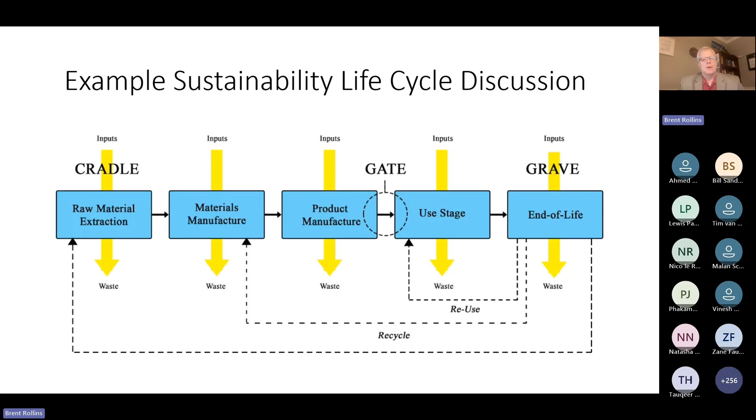So we're going to talk in the panel discussion possibly about what the future might hold, so I'll leave that for then. But for now, where we are is mostly cradle to gate analysis in the embodied carbon of what it takes to make a cubic meter of concrete. And what we're going to be discussing now is an alternate or additional approach that I believe we should be considering, which is cradle to grave, meaning that you take into account the life expectancy of your concrete structure so that you can have an annual average embodied carbon for the life of the structure. I think that the length of service life is currently being overlooked a little bit, but we will talk about where things are going with the American Concrete Institute, as well as reference some FIB information today.

So to start with, just to refresh everybody on Portland cement concrete and the basics, and this is important to understand where colloidal silica fits in. I know most of you probably know this, and you're going to be looking at the next 2 or 3 slides and say, Brent, I didn't sign up to learn the basics of concrete, but I'll touch on it, and then I'll show you where colloidal silica fits in. But first, I'm going to share some statistics.

Did you know that concrete is the second most used substance on the planet, behind only water? In fact, 2 times as much concrete is used as all other building materials combined. That's a tremendous amount of concrete. To put that into perspective, we make enough concrete on this planet to go to the moon and back 48 times with a 4-foot wide or about 1-meter sidewalk, somewhere around 100 millimeters thick. That's a lot of concrete.

But the problem is that too much of that concrete is replacement concrete for concrete that has failed or aged and needed to be replaced. We think of concrete as being a permanent thing. I mean, if you refer to an idea as a concrete idea, that means it's solid. It's something that's going to last a long time.

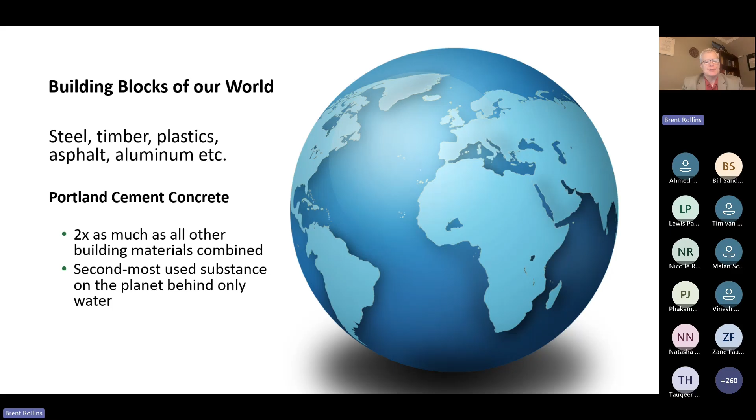It's got huge implications. Well, when we think of concrete as a permanent material, we're giving it some credit that it doesn't deserve. It's a good material. It's a great material, but it doesn't last forever. We're going to dig in a bit to just what the causes of that could be and why our concrete isn't lasting as long as maybe we'd like to see it last.

So we use so much concrete because it can be cast into virtually any shape, especially with the new chemical admixture technologies that allow things like self-consolidating or self-compacting concrete. It can take on the shape of a form. In years past, in the 1960s, you could get concrete in any shape you wanted, as long as it was square, rectangle, or in the shape of a pipe. So now you really can get concrete in just about any shape that you want.

Concrete does carry loads. It does what you engineers want it to do, which is to hold up buildings and resist things like wind loads and live loads. It is durable compared to other building materials, and it can be green.

Excuse me. I've got some water here, not anything else.

And what I mean by that, it can use recycled materials. It can even reduce the heat island effect. Just as a quick note, dark colors in an urban area absorb sunlight. Dark roofing materials and dark paving materials generally cause an urban area to be a few degrees warmer than the surrounding countryside. So by using Portland cement concrete, we can produce a lighter, more reflective surface that reflects more sunlight than it absorbs, and thus lower the temperature of urban areas. So that's one way concrete can be green.

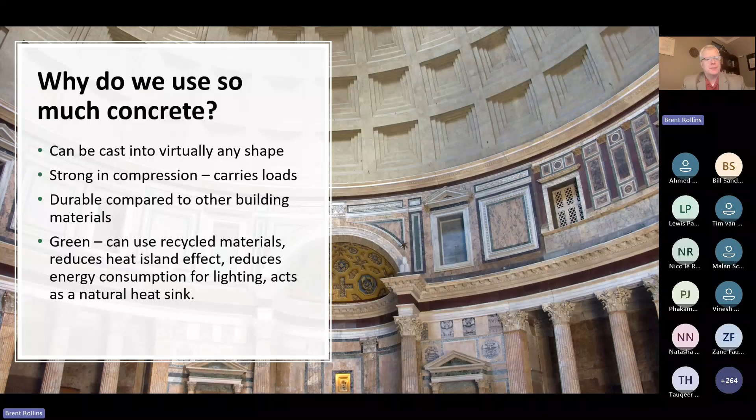So concrete, again, we're not going to spend a lot of time on this, but fundamentally, concrete is made from Portland cement, coarse aggregate and fine aggregate, and water. That's all you need to make concrete. That's the way we've been making concrete for a long time. However, most modern concrete uses something known as supplementary cementitious materials, or pozzolans. In some cases, like in Europe and I believe in South Africa, that pozzolan is often interground into the cement, like what we're doing with the limestone here, or in some markets it could be purchased separately and stored in a separate silo to be weighed up separately from the cement.

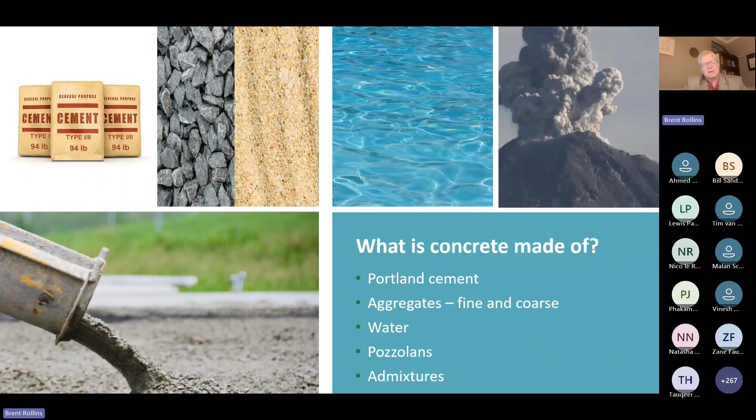Most modern concrete also contains chemical admixtures, and chemical admixtures exist to do just about anything you'd like to have your concrete do. If it's cool and you want it to set quicker, you can accelerate the setting time with something called an accelerator. And if it's setting too fast in the summertime, you can slow that down with a hydration stabilizer. You can use water reducers to make the concrete move without adding water, for instance, and on and on. So again, our focus is going to be pozzolans for now, because I want to show you where colloidal silica fits in.

And one of those volcanoes, the most famous, Mount Vesuvius, erupted in the year 79 and scattered ash throughout the countryside. And the Romans found that when they would incorporate this ash into their concrete, the concrete was more workable, got better strength, and seemed to be more durable. So they began using this ash. Well, that technology was lost for several centuries. And then in the early 1920s, a Cal Berkeley researcher posited that ash from coal could have some effects on concrete.

And thus, fly ash was born. And fly ash is the most widely used pozzolanic material from coal burning power plants across the globe. However, as we adjust our power grid and we start looking at materials and processes that are not coal burning, fly ash has started to become in short supply in some markets. I think we still have quite a bit to go through, but it's caused us to start looking at other pozzolans. And all of these other pozzolans that you see are supplementary cementitious materials.

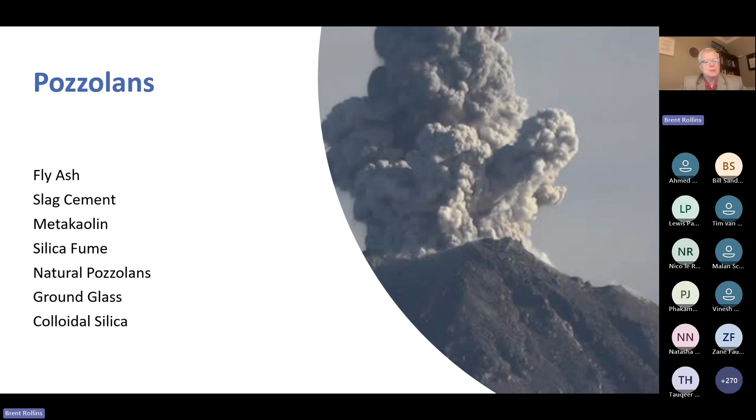So let's get into why that pozzolanic reaction works, what happens. So this is a bit of a science class, but it is simplified. And I took this from some slides from Georgia Tech, famous Georgia Tech professor Kimberly Kurtis. She's the originator of this slides idea. I use my own images though.

So if we take cement and we add water, magic happens, right? The cement begins to harden, it begins to gain strength, and that is a chemical reaction that produces, among other things, calcium silicate hydrate. That calcium silicate hydrate is the major reaction product that gives concrete most of its strength and durability. Among other reaction products, there's one called calcium hydroxide that is also produced. That calcium hydroxide really doesn't add much to strength or durability. It just sort of sits around in the concrete waiting on something to react.

Well, along comes pozzolan. If we put pozzolan in the concrete, whether it's mixed in or somehow applied later, as we'll see, you get a chemical reaction that consumes some of that calcium hydroxide or portlandite to produce, guess what? More CSH. That same reaction product that produces the strength and durability that we want with concrete. The pozzolan produces that secondary CSH. So that's the key reaction.

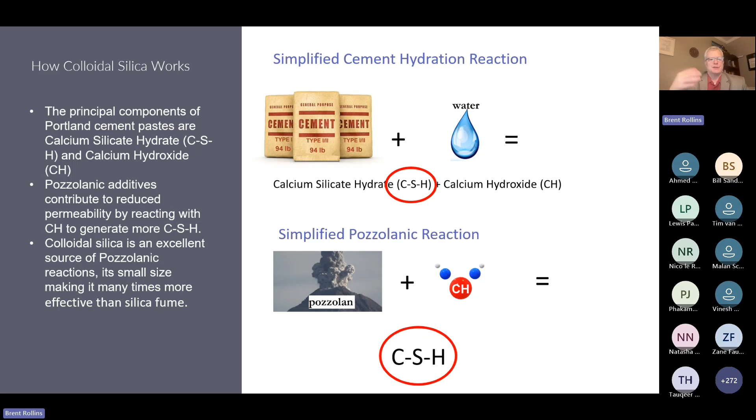And when you bring colloidal silica into that, being a pozzolan, that is the reaction for colloidal silica. However, colloidal silica is able to produce this reaction much more efficiently than the other pozzolans because of its small size. The reason this is important is concrete's permeable. We don't think of it as being permeable. We think of it as being a hard, solid substance that lasts forever, right?

But the reality is that almost all concrete, I don't want to say all, is made with more water than is needed for that initial chemical reaction to take place. There's a few reasons for this. Number one reason is that the chemical reaction between cement and water is not just a one and done reaction. It doesn't just happen on day one and then stop. The reaction begins as soon as water and cement meet each other in the mixer. The reaction starts to progress and build heat at various speeds, depending on temperature and grind of the cement and some other things. Then it's placed.

And when it's placed, some of that water that is in there to allow us to place that concrete leaves through bleed water channels and capillary void structure. So you have some evaporation of that extra water, that water of convenience that we use to help place concrete. Some of it leaves during the setting process.

What happens with that is that the little rivers that form, or the little capillary void structures that form, then become set in space as that concrete hardens. Now, I don't want to make it sound like they stay the same size throughout the concrete's life. They do fill up gradually over time with reaction product, but you have a route of ingress, a way for water and the contaminants that water carries to get into the concrete now, because of those little tunnels that were formed as the concrete was setting.

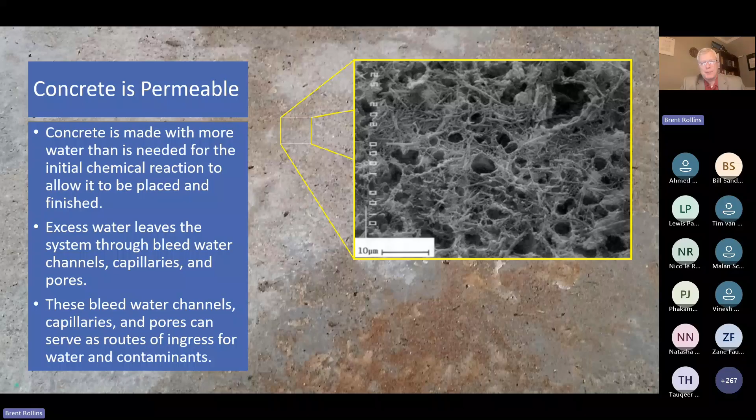So if you remember your calculations from school or what you work with every day, you know that as you lose reinforcing steel section, you're losing the ability to carry tensile flexural loads. So that is a major concern when it comes to concrete durability. All right, so I spent a lot of time on the background. I'm not asking you to believe me on any of this. The Portland Cement Association, based in Skokie, Illinois, has a great definition. Many others have good definitions on permeability and durability.

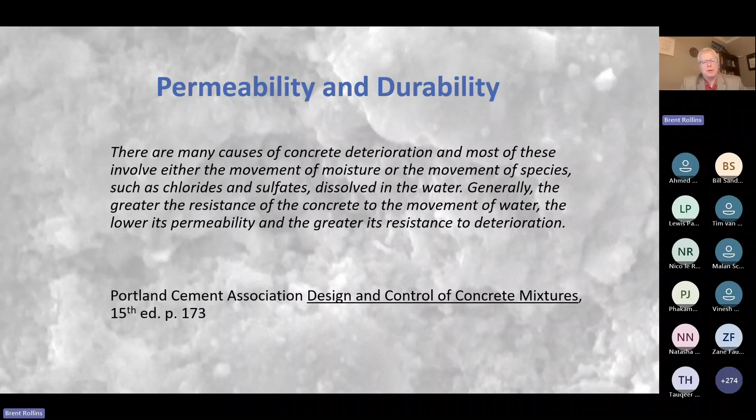But the reason this permeability is important is because it directly affects the durability of the concrete. As permeability goes up, durability goes down, and vice versa. If permeability goes down, then durability goes up. And you have some wonderful concrete engineers in your country, several whose publications have influenced my career, including Professor Mark Alexander, as well as Professor Hans Beushausen and others. The people that study concrete durability know that permeability is the key, and measuring that permeability and measuring improvements to it is the key to predicting service life of concrete. That's important because our concrete isn't lasting as long as we want it to, as we mentioned earlier.

Back in 2012, the American Society of Civil Engineers, ASCE, a wonderful organization, put out a publication that gave our infrastructure in the United States a D minus. Almost a failing grade is what that means. We do letter grades in the U.S., A, B, C, D, and A is the best, D is the lowest that could pass a class, D minus is lower still. What they found was that 1 in 6 bridges in the United States needed to be repaired or replaced back in 2012. That's not good because we have over 600,000 bridges in this country. And that means that over 100,000 bridges at that time were in bad shape.

And I hope that we've made some changes and improvements, and I hope to be able to report back to this group that we've fixed everything, but we're not quite there yet. The reason that I mentioned bridges, by the way, is bridges are publicly funded in general, and because of that, their inspection records, as well as publications surrounding bridge technology, are public record and are accessible. And they're the most studied concrete elements, really, in my country and maybe even on the planet. But it's not just bridges that are having a problem. I have a favorite saying that concrete doesn't know what it's going to be.

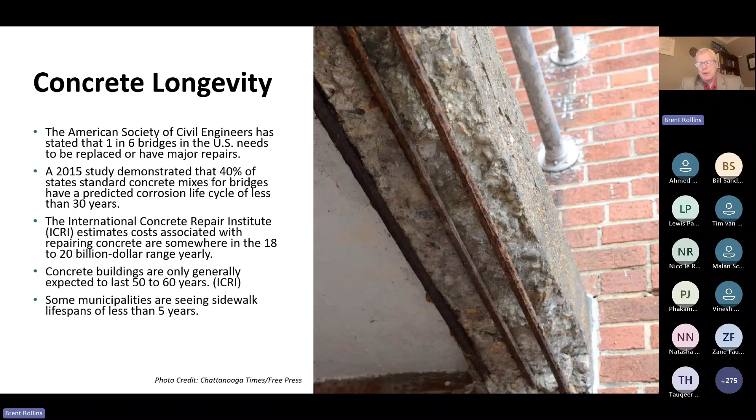So now we get to what is colloidal silica and how does it work? And thank you very much for your excellent introduction, Tauqeer, and the information that you gave us was spot on about colloidal silica. It's amorphous silicon dioxide on the nanoscale. That's all it is. But understanding that small size is important in understanding the function of colloidal silica for two reasons. A nanometer is 10 to the negative ninth meter. So we're talking about a billionth of a meter.

That is a tremendous amount of tiny, tiny particles that you can put into concrete. And I'm going to use some examples. That photo of a pore structure that you see is about 20 microns in diameter, or about a third of the average human hair diameter. If we assume that that hole is as deep as it is wide, it will hold about 700,000 average size colloidal silica particles. That small size allows that colloidal silica to get to over 99% of the interconnected pore space in concrete.

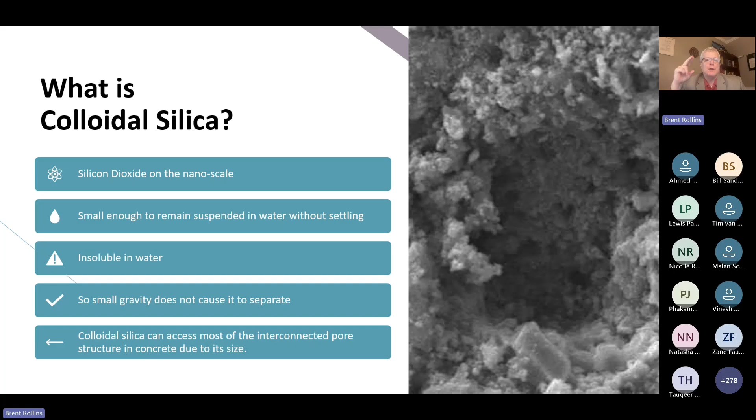So to put that into further perspective, I know you guys like rugby there. If you imagine that average colloidal silica particle is about the size of a rugby ball, then the average pore structure in concrete would be about 3 kilometers wide. So that's how tiny we're talking. We're talking about a very, very small material, and that size is the key to its effectiveness because it gets in deep, really, really deep, and it also is able to have very high reactivity because of that small size. That small size translates to surface area.

Then when you start getting into high strength or high performance concrete, then you start using finer and finer ground materials to make sure that the particle packing is going to take place properly. And that's a key to both permeability and strength development in some of these high strength mixes. You start using some exotic pozzolans or supplementary cementitious materials like calcined clays, metakaolin, etc. Silica fume is another one of those exotic pozzolans. And I say exotic just meaning not often used.

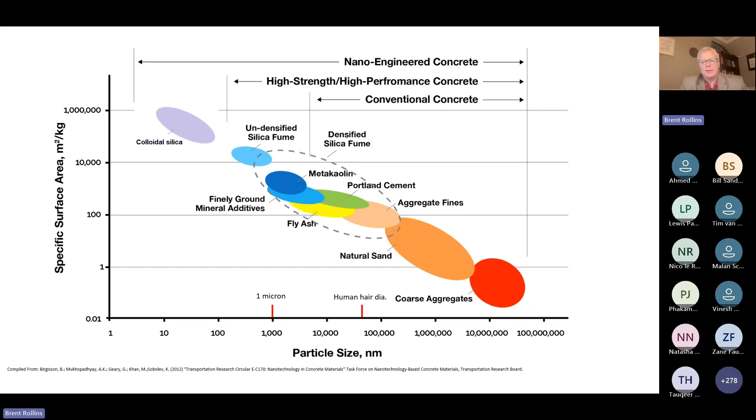Colloidal silica can be put in the mix, but most often what we see effectiveness-wise is to apply the colloidal silica by spraying to the concrete surface where it enters the concrete. Again, its small size allows it to get deep, and what we've seen in the laboratory on a very dense mix with about a 0.30 water to binder ratio is 38 millimeters on a 100 millimeter slab is the least that we've ever measured. We usually see somewhere between a half to a third the depth of the concrete member, and it can be applied horizontally, vertically, or even overhead.

Now, that application process, just to give you an idea of what it looks like, the spray is happening. You're applying very much like a traditional spray applied curing compound or sealer, but it does only take one pass. With a 50% overlap, you apply a quantity to an area. So you'd have X number of liters per square meter, for instance, and it enters the concrete where it reacts, closes that void structure with a reaction product that is common to concrete, CSH, calcium silicate hydrate, the same reaction product that gives concrete strength and durability.

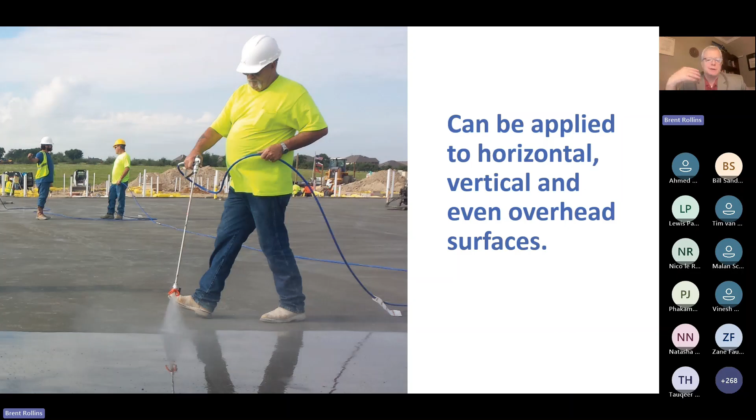So this is the beauty of colloidal silica, you're essentially filling void structures with more concrete. It's a permanent change to the microstructure. It can't be removed, and it's deep. So the only way to get rid of it is to remove the concrete itself. So I want to share some real science with you, though, because I don't want this to sound like a sales presentation.

There was a PhD study that was sponsored by Total Energies in France a few years back. Student's name was Baddredine El-Haddaj, and I'm grateful to be able to say now Dr. Baddredine El-Haddaj. And it was overseen by some of the biggest names in the concrete industry, including Nicholas Roussel, who's current chair, if I'm not mistaken, of FIB, as well as former MIT Concrete Sustainability Hub chair. I'm blanking on his name right now, but some nice big names.

But to bring the information I want to share to light, let's take a look at this graph. So you can see the log diameter in nanometers of the pore structure. This is a neat cement paste that was studied. And you see different water to binder ratios. Now, the graph was in French, so that's what the E/C is. Think of it as W/B. And you see about 0.4, 0.5, and 0.6. And you can see those dotted lines. You have an average pore diameter in the case of the 0.6 and 0.5 greater than 100 nanometers, and the 0.4 right at 100 nanometers.

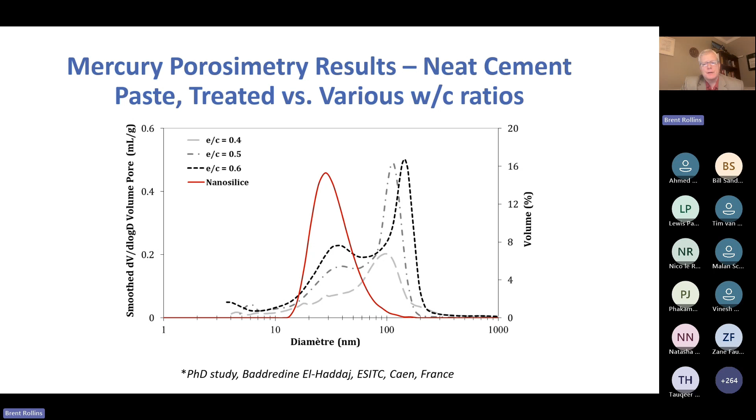The colloidal silica, what they're calling nanosilice in French, was applied to the surface of the neat cement paste, and then the pore structure was examined again a few hours later. It was the 0.6 that was treated with the colloidal silica, and its average pore diameter went from well above 100 nanometers down to about 30 nanometers. So that reduction in pores in a neat cement paste is a demonstration of what the product can do for concrete. This was ESITC in France, one of the top technological universities in that country.

So what does that mean for durability? Now, I made a promise to you guys, and I've got about 10 minutes left, that I would be talking about sustainability. And all of this presentation has led us to this point. This won't take long. You see here, this is life cycle modeling, software modeling with Life 365, which is an industry developed life cycle modeling for concrete. It's a corrosion model only. It's got some FIB code as well as some historical information that feeds it.

But you can see that the colloidal silica treated concrete compared to the plain Portland cement concrete was a 20-year life cycle at this particular coastal location. And this is the shoreline exposure. And you can see that with colloidal silica, it's expected to last 50 years. So from 20 years to 50 years.

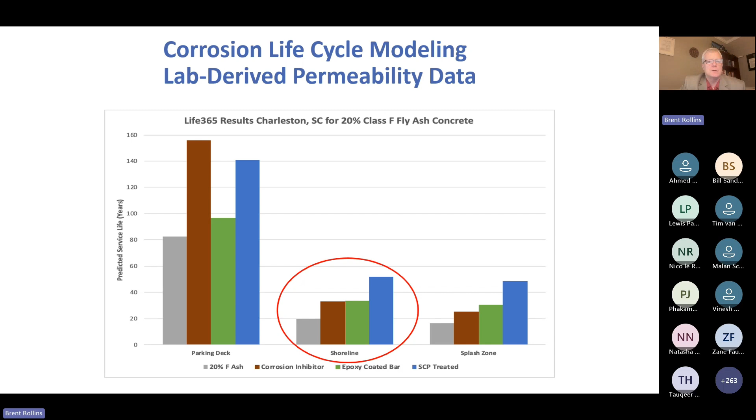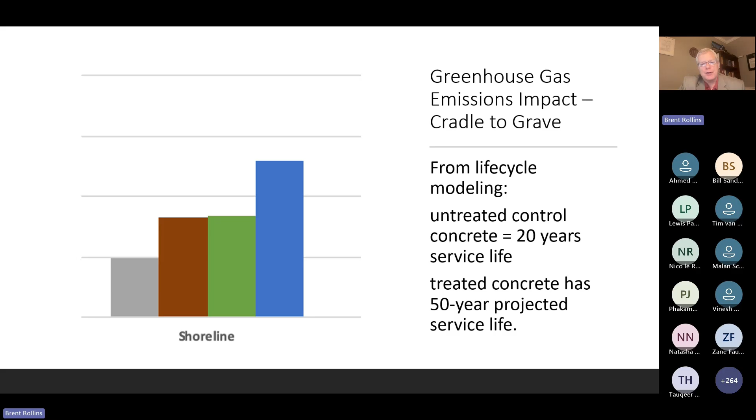So what that means is that impact on total life cycle of the structure, greenhouse gas emissions impact. You get an untreated control concrete, 20 years of service life. Treated concrete's got 50-year projected service life. What that turns into is, if we assume 10,000 tons just for a round number of CO2 equivalent embodiment for the project, at the end of 50 years, the embodied carbon of the control concrete, assuming full replacement, would be

25,000 tons if we didn't treat it with colloidal silica. If we did treat it and you did get the 50 years design life out of it, then that embodied carbon would still be about 10,000 tons. So you can see a multiplier of 2.5 in this particular case.

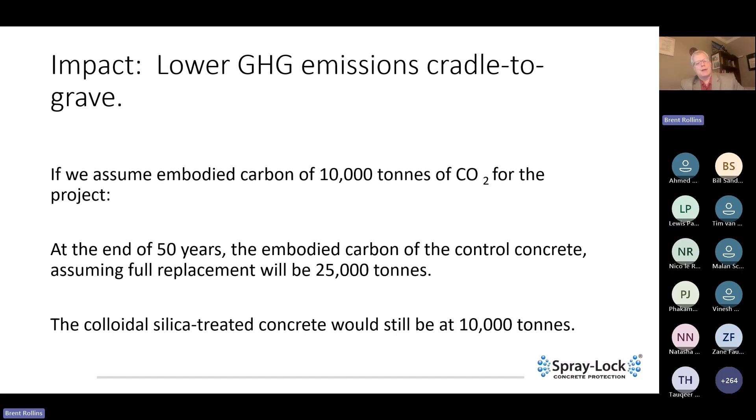So what I'm proposing is that we learn more and we work harder to be able to use predictive modeling to predict the life cycle of our concrete structures more and more accurately. And there's some good models out there, but we need to close the loop. We need to work hard to make sure that these models are producing reliable results. So that's the key to the discussion. Let's make our concrete last longer. And by doing that, we can make a long-term sustainability impact.

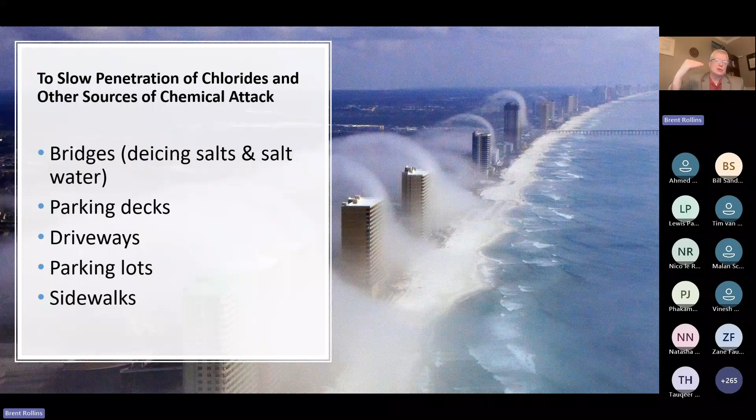Now, colloidal silica has been used on all of these things to slow penetration of chlorides and other contaminants: bridges, parking decks, driveways, parking lots, sidewalks. Again, concrete doesn't know what it's going to be, but it's all going to be permeable to some degree. Let's close that permeability and shut down the transport of those harmful materials that get into concrete.

I've got a couple minutes. I want to share a couple of quick example projects. Colloidal silica can be used on new concrete, or it can be used to treat existing concrete. If you treat existing concrete with it, the main thing you've got to remember is that the material must be able to get into the concrete to be effective. And sometimes that requires mechanical opening of the concrete surface with things like grinding or shot blasting.

This particular project, you see the pictures here, is a tunnel in Chattanooga, Tennessee, that was built in 1938. The tunnel had received very little maintenance throughout its life, and in 2015, the city decided to refurbish the tunnel. It's almost 2 kilometers long, so it's a decent sized tunnel, and it was leaking really, really badly. So the city began doing the work, and they were using crack injection, and they had used up 75% of their crack injection before they had made it a quarter of the way through the tunnel.

And I got called in as a consultant. I was still at the university in 2015, and they asked me what I thought they could do to help the concrete. And I helped convince them that they should use colloidal silica to try to manage that permeability through the concrete. Now, you had water coming through cracks, but you also had water coming through the matrix of the concrete.

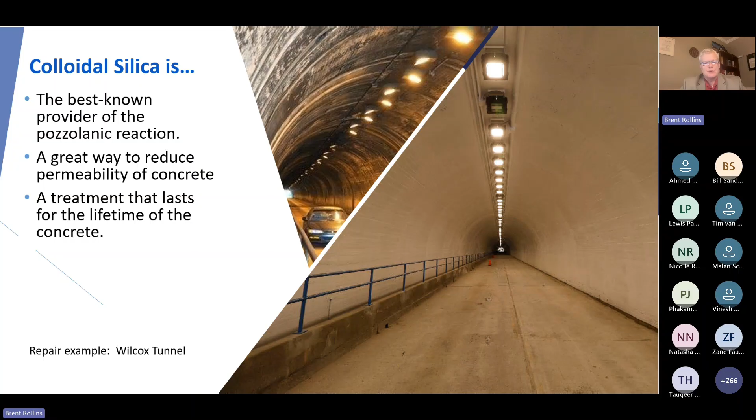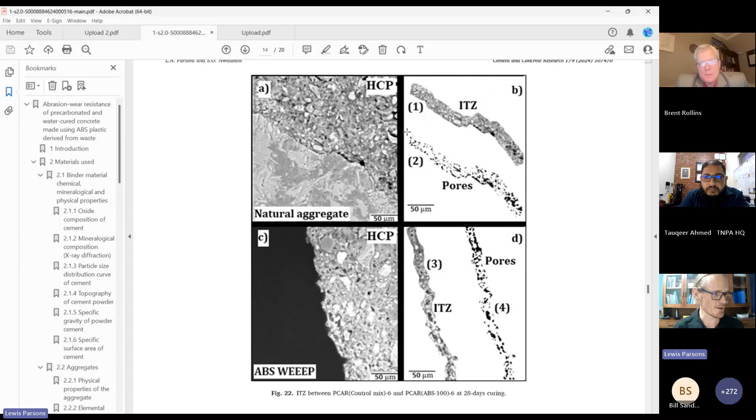Okay? Yes. So if we look at this, at the bottom we have a BSE backscatter electron image. The brighter points that you see here are unreacted cement, while the darker points are pores. And if we segregate the ITZ and the pores, we can clearly see that utilizing these plastics does result in higher porosity at the interfacial zone compared to what we find with our pastes.

Now, indeed, that could happen, and we can have some refinement. But I was wondering what your view is, because you mentioned durability. Yes. What we find more often than not in industrial areas is that our buildings are attacked by sulfuric acid in the form of, for example, acid rain. All right. Now, this CNS that we have over here, how does that compare under sulfuric acid attack, when instead of utilizing CNS as a surface treatment, I suspect that it's a multifunctional system that you have.

How does that compare to rather utilizing a different surface treatment like nanoclay, which is a little bit more on the environmentally friendly side? How would you compare the use of CNS with that of alternative surface treatments when looking at sulfuric acid attack? Yeah, what a great question.

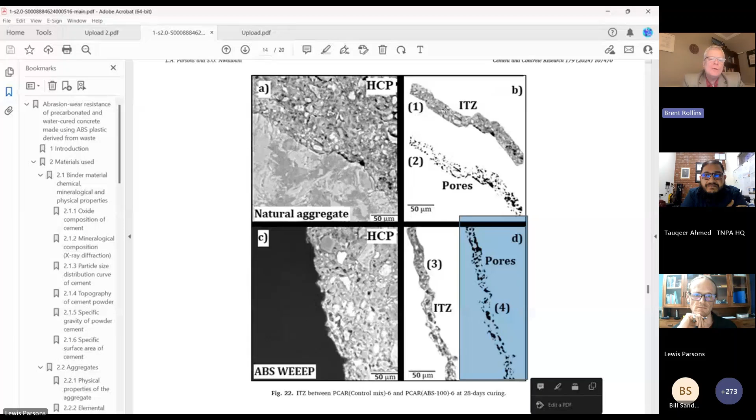I know very little about nanoclays, but if the dispersion package and the way that those nanoparticles are kept from flocculating, because nanoparticles, from van der Waals forces and other things, they like to clump, and so that's why we're producing the nanosilica in a colloidal form rather than as a bulk powder.

So the key to performance, yes, the particles should be reactive, but we have to get those particles where they need to be effective, to be able to penetrate into the concrete, to get to the ITZ, to refine that pore structure, is going to require some chemistry on the dispersion package side that allows that product to penetrate. So yes, it is a capillary rise type of penetration, but it's more than that.

So if you take the colloidal silica product that I work with, and you take deionized water and you put them both on concrete, the colloidal silica penetrates about 4 times deeper vertically, upwards, than the deionized water. So there's an attraction that I can only assume is an ionic attraction of some kind pulling that into the concrete, some form of electrostatic force. Yeah, it's more than capillary rise. There still needs to be some more study done on some of those things.